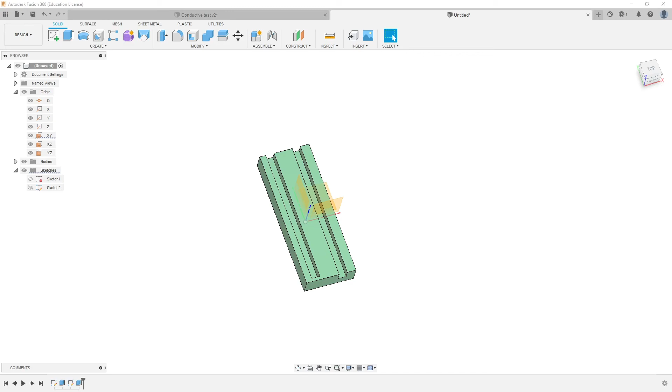I am going to talk about how we're going to use the projections we just learned about to anchor the slots we made to the edge. So if we change the size, the length of this block, they will follow along. That's the main goal. We're also going to talk about symmetry, how we get the two slots to be even across the center line.

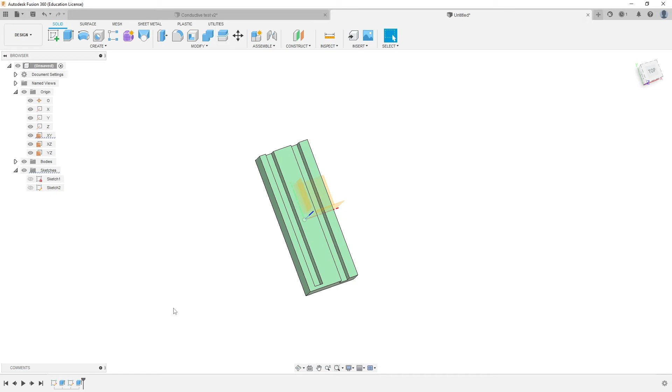So I want to modify this. I pick this somewhere in the slot right there, and notice you get these lines over the top of the extrude. That's where we're at.

Over here, if you did this in order—this is a bit of a bummer the way Fusion does this, but whatever—if you made a sketch, then extruded it, then made a sketch and extruded it, you could theorize that the sketch for those slots, that solid right there, is this sketch right there.

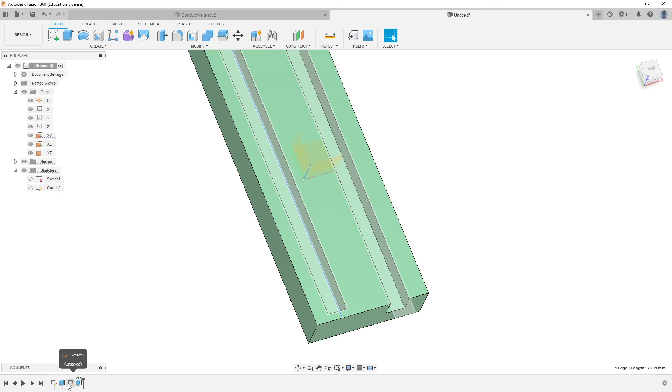So now I can double click on that and get back into it, okay? Now, the 5 millimeters that is here, we can go ahead and leave that.

But what I want to do, I'm going to tip this to the side. I want to do the projection. Now, this is why I didn't show you projections right here immediately, because my plane, my sketch plane, is right on top of the face.

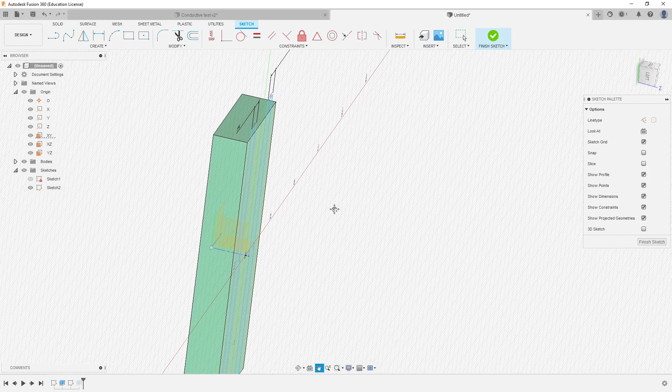So the word project, it kind of makes sense that it's sending it somewhere. The last video I showed you, that made sense when I put the plane out here and you see it projecting. Well, now when I pick this edge, it's going to project it onto the plane that I'm on, which is really in the same place as that edge anyway, so you're not going to see anything very dramatic.

The other point here, though, is even though this thing right here is planarly in the same area as the sketch we're on, they are not pickable. They're not the same thing. I still have to project it forward.

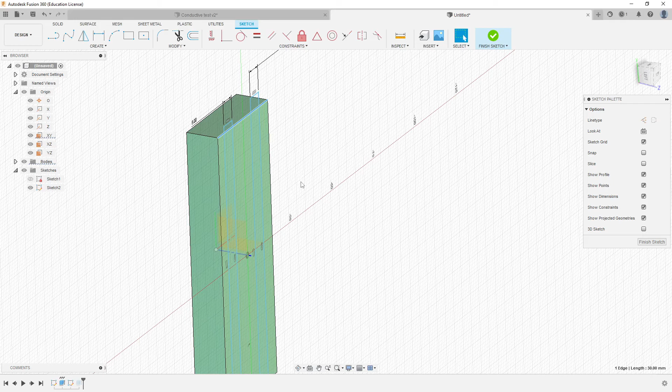So I'll click on the background just to do this all nice and proper. I'll hit P for project. That brings up the project window, and I can pick that edge right there. Then I can come down here and pick that edge right there.

And if I project them right now, they will be solid lines. Remember we talked about this? So I'm going to come over here and turn on construction line before I project them.

Okay, so two things are going to happen here. I'm going to make a projection, and as I project it forward, it's also going to turn it into a construction element for me, a guideline.

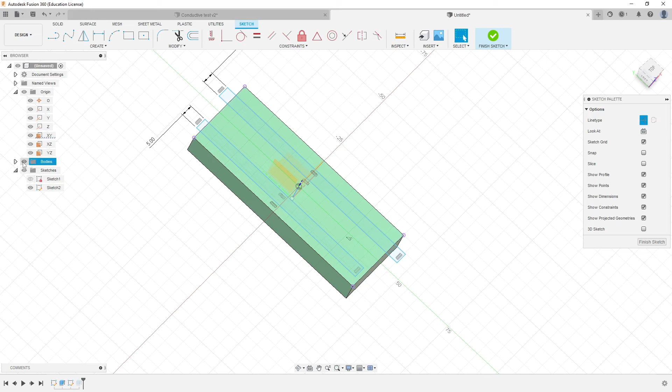So watch, I hit OK, and you can barely tell. You can see there's some purple dots in the corners. If I hide the body, you can notice that there is that purple construction line, okay?

And again, I cannot manipulate this. I can't move it because it's linked to the other feature, okay?

Now, if I was slick and knew this beforehand, I would have done it first, and then made my rectangle like this. I would have went snap to it. Did you see that little X? That was a snap to a line.

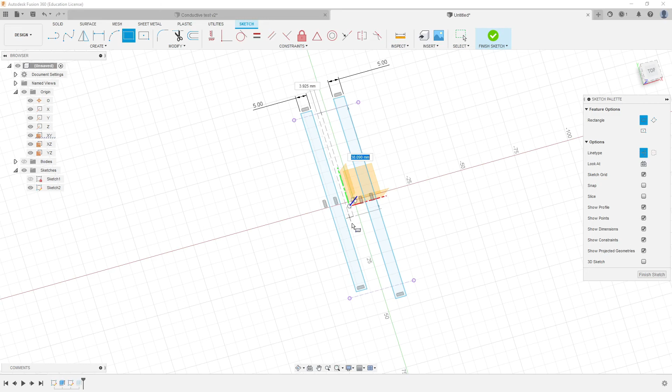Uh-oh, see, by the way, I'm making a construction line because I forgot to deselect it. That's going to happen a lot to you. I'm going to go ahead and continue this, and then I'll just undo it.

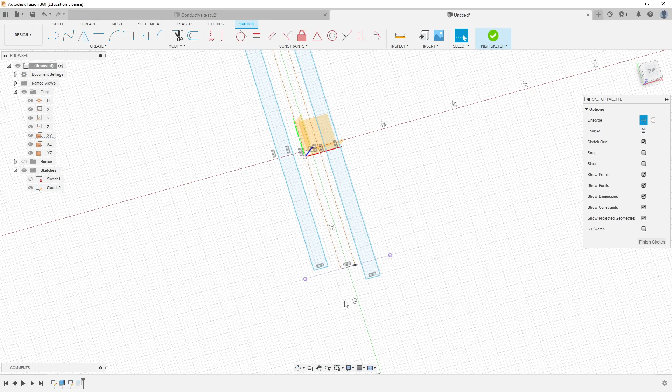So I come down here. See that X right there? That's snapping to the line. I click that, and now, if you can tell, it's kind of dark right there. It's anchored to that line. See? That's pretty good. I'm going to hit Control Z and get rid of that.

I'm going to click on the background, and turn that off just in case. Now, rather than delete these things and do it again—just because I showed you that it's probably a good way to do that—I can do it after the fact. So you have these constraints up here that are geometrical type constraints.

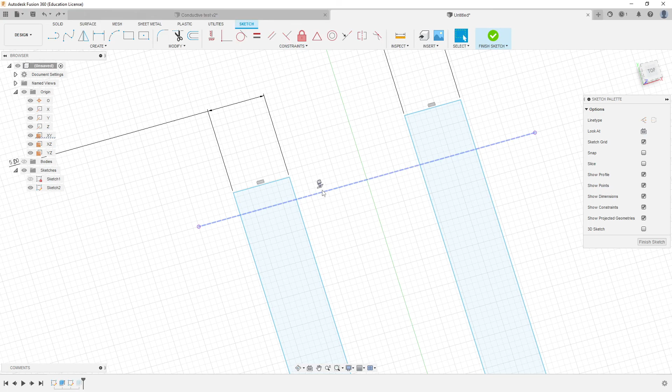Instead of being a dimension like a number, this is saying I want to make this point on that line, or I want to put this point on that point, or I want to make this line parallel with that line, etc. So the thing I want to do here is make this line collinear with this line.

I pick it. You could do it in a myriad of different ways. I could pick this one here, then pick collinear, then pick the other one, or I could pick this one, control-select it, then hit collinear and it would do it, or I could hit collinear first and then pick the two of them. Either way works. Did you notice it went black?

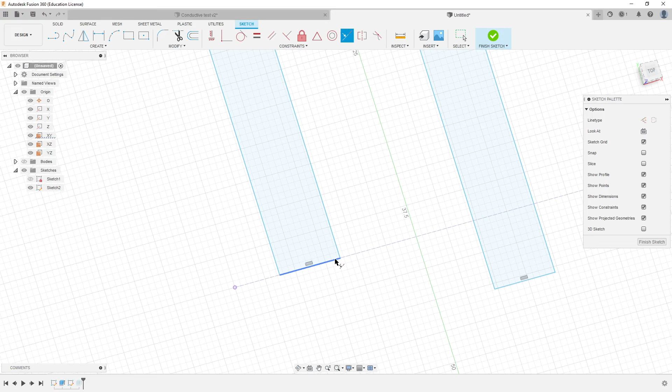This one here looks like it's right on the edge, right? It's not. It's not black. So I still have collinear selected, the tool is in my hand, so to speak. So I pick this and I pick that edge. Now it's black, now it's locked to it. As a habit, let's undo that.

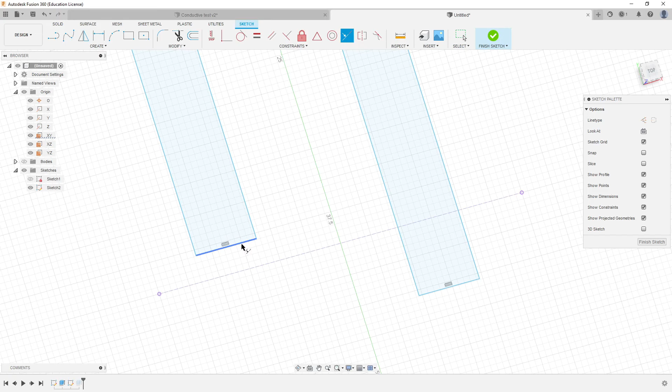When it was right over the edge like so, if you don't remember that it's supposed to turn black, grab the corner and wiggle it around, and you'll see that it's not anchored there. So we'll hit this, we'll hit that, we'll pick this, we'll pick that, get this one here and that one there.

Now they are - I undid too far. So I pick that one and that one. There we go, all black. Notice we're watching now for that black line. So we're stuck there, however, we can still move it side to side.

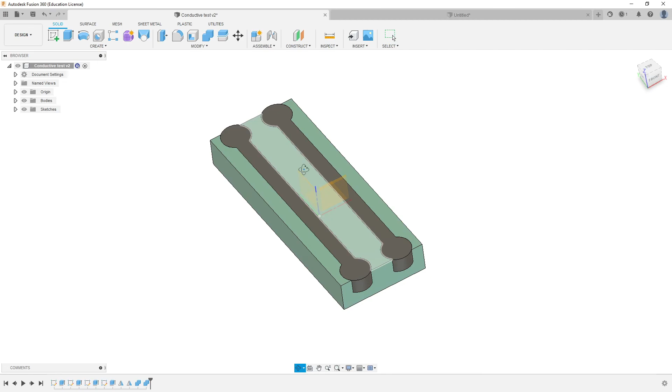So we need to fix that, and that's going to be done with a dimension, D. I pick this one right here, I pick that one right there, and bring this out. Did I make it 10? 10 seems kind of big. Let's go check the other one here. I can go to this sketch right there, and the distance - yep, it's 10. So they're 10 apart.

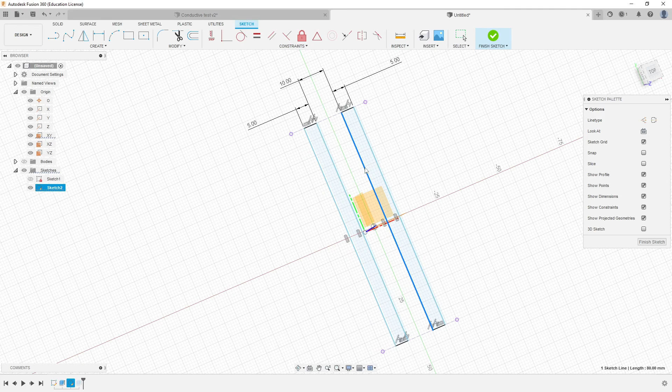Now it still didn't turn black though. We've got 10 here, we've got 5 and 5 here. We've got it locked vertically, if you want to call it that way. But you see, it still moves side to side. But the two of them move together - they're all locked together, but we're still moving side to side.

So what I could do is dimension this line right here to the center point right there. You see that? And I could make it be 5, half of 10, right? But another way to do this that's a little more permanent - meaning, what if I made 10 be 15, and that other one's still 5, and it's going to be offset. You see how we're thinking? We're thinking ahead - if you modify this, we want things to follow along nicely.

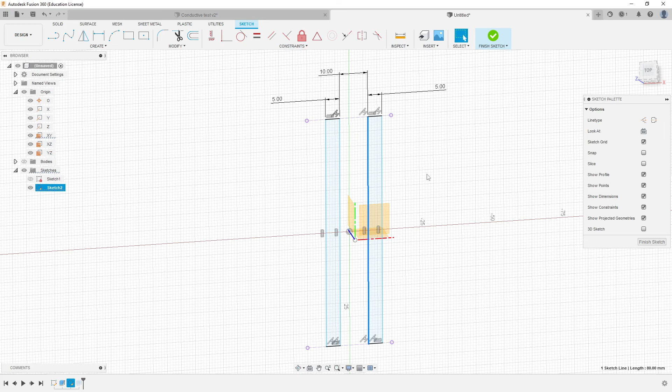So I would like these two right here always to be even across a center line, you see? So I want to use this symmetry tool. The way it works is I'm going to pick one thing, pick another thing, and then a center line, and it's going to make it even across. However, I do not have a line yet, and this is a small irritation, I guess you'd say.

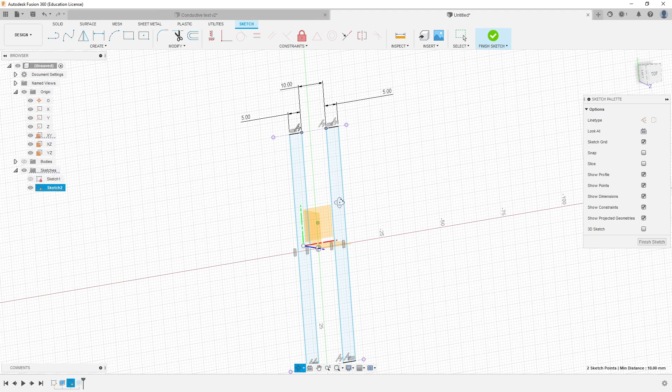Let's see what I can do with this. So I can pick this one here, I can pick this one here, and if I hover over, you see what I'm doing here? I can't select these things - it doesn't let me. Other programs will let you pick them. See this red line right there? And the green line? Nope, can't pick them.

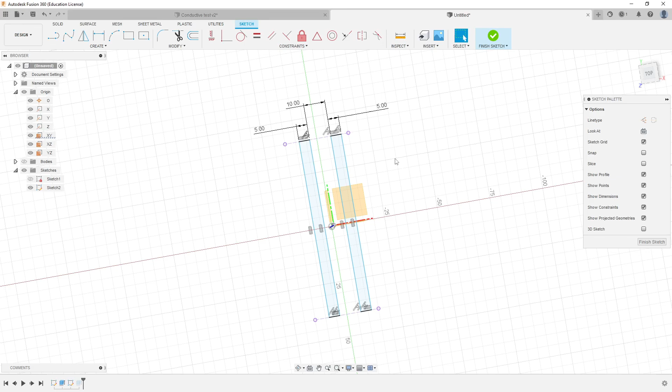Other ones would. So unfortunately, looking ahead at what you're doing here, you go, I want to do symmetry, I want to make them even across there. I am going to make a line. So I hit L for line, which is this right here, the L for line right there. Okay, so I have the line tool in my hand.

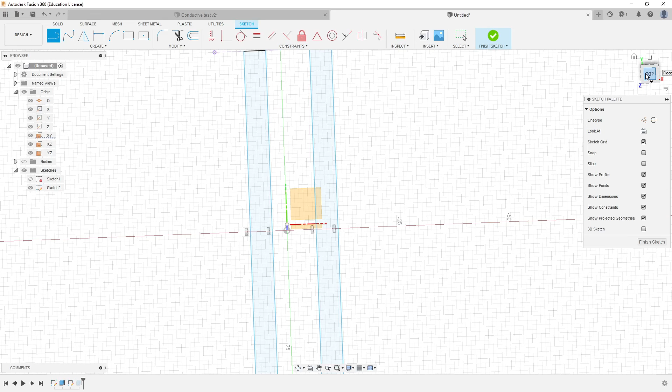I want to draw a line from the center point. I want to snap right to that center point - which center point? Well, the one that's on my sketch, not that one down there. It won't even let me pick it. I want this one on my sketch, that's the center of the sketch. If I go from the top view, everything lines up. Kind of makes sense, okay?

However, if I click and make a line, it's going to be that solid line, you see? So before I get started, I'll hit L for line and come over and hit construction. Or if I'm really slick, let's undo this — I hit L for line, then I hit X for construction, and that comes on automatically.

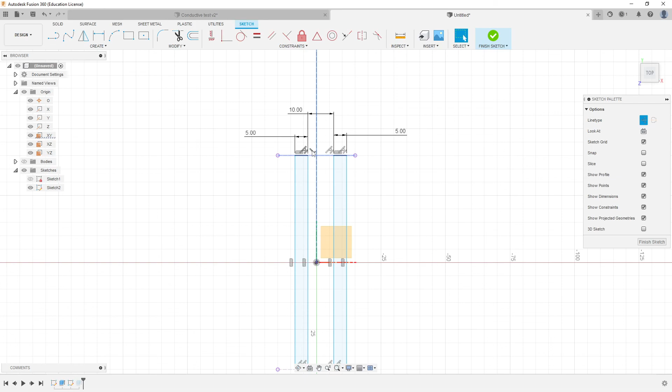Then I come up here, I pick, and I can make it really short, but that's hard to see. I don't need to snap to that line, but you could, because sometimes that makes good sense. Or I could also just run it way up here. You see? Now I ran it straight up, and it saw that it was perpendicular to this line right here, so it made it snap to a perpendicularity.

Other times you do stuff like this — L, bring this up, as I tip this around, snap, it just snapped to something. See that right there? It's making a parallelism to something over here. You see that right there? So it says that's parallel to that.

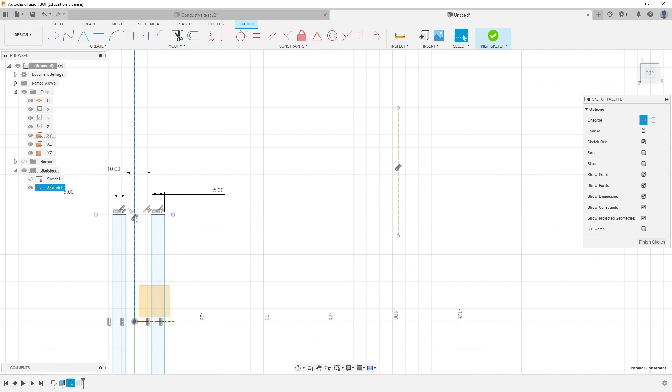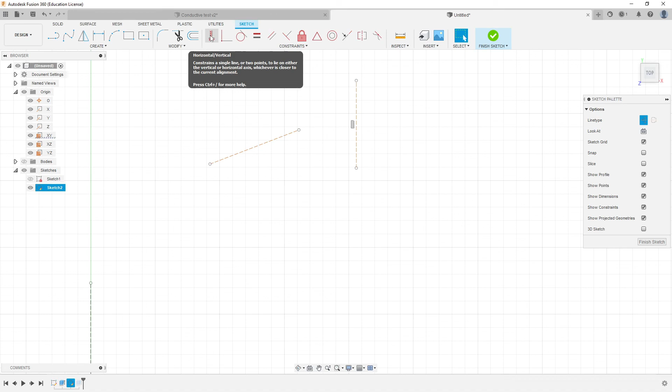The other thing you would normally see if there wasn't anything here to stick to is it would snap up and become this. That's a vertical or horizontal constraint right here. So I hit L for line and bring it kind of like this. It's kind of crooked, but it's mostly horizontal, not quite vertical. Depending upon which one is closer, it will snap it to it, you see? So this constraint happened automatically — this was me doing it manually, I guess.

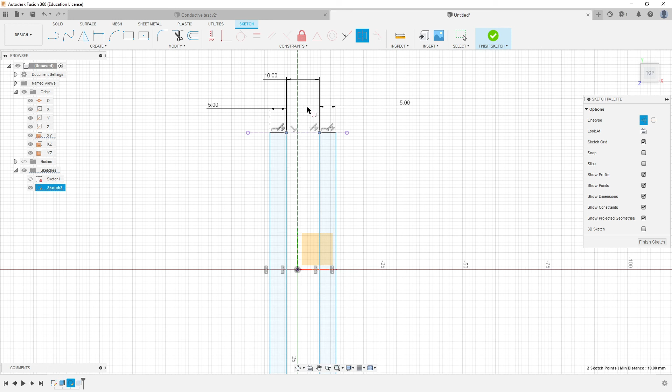Okay, so I'll select that — by the way, that's how you do that. Delete everything there, zoom in here, and now I have my line. Now I can go to symmetry, and I can pick — I usually pick a point. You could pick a line, that's fine too, but I pick this point, I pick this point right here, and then you pick the line. It doesn't tell you to do this, you just have to know that's how you're supposed to do it. And then, boop, everything moves over.

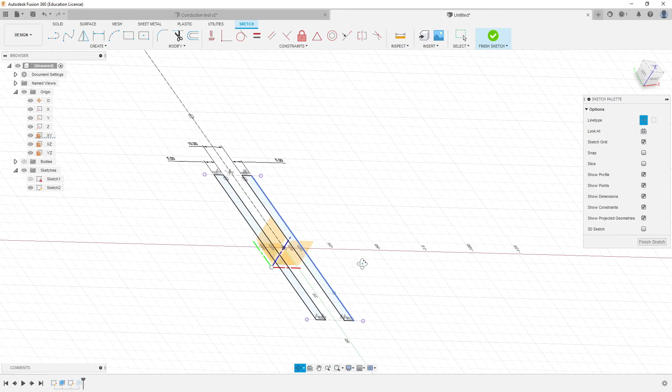Because this is 5, this is 10, that is 5, this right here is snapped to the purple line, this down here is snapped to the purple line. With the addition of the symmetry, it all turns black because there's no more ways that this could possibly move. And so that's our goal — that's what we want to do with every single sketch we make. I would even say even the stuff you don't care about, because it's good practice. It's a very good habit to build, so it's not so stressful when you have to do it — it's just already a habit.

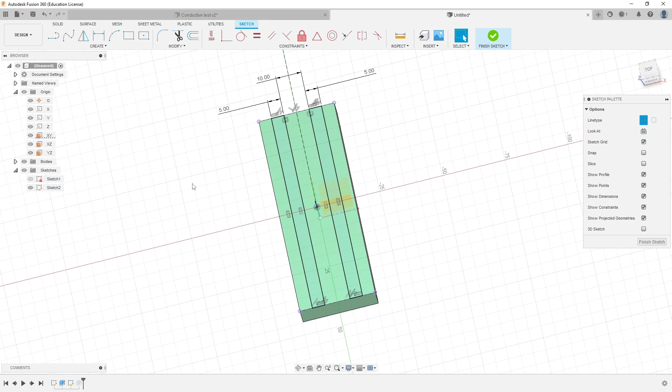So I'll turn back on the body. Now we've already extruded it, right? So don't go extruding it again — we'll just finish the sketch. And there we go. Okay, so there's our extrude down here, and it's doing what it's supposed to.

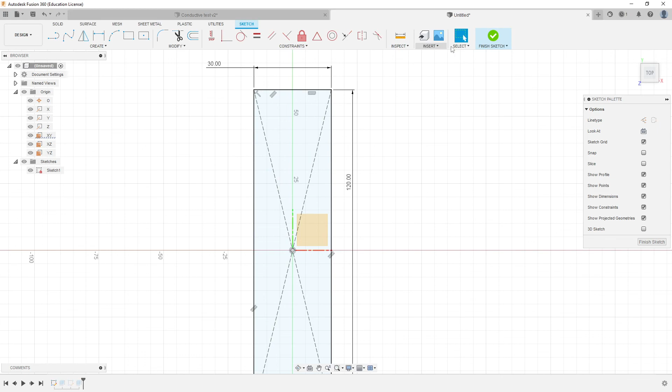If I were to go back here now and change this from 80 to 120 — because we did the projection and made it a construction and stuck the rectangle to it — when I finish this sketch, this will get longer, and so will the trough, you see? So that's a quick, fast reason why we do things like snapping things to projections and to edges, so it can accommodate future edits without you having to go back and manually edit all the dimensions of everything, right?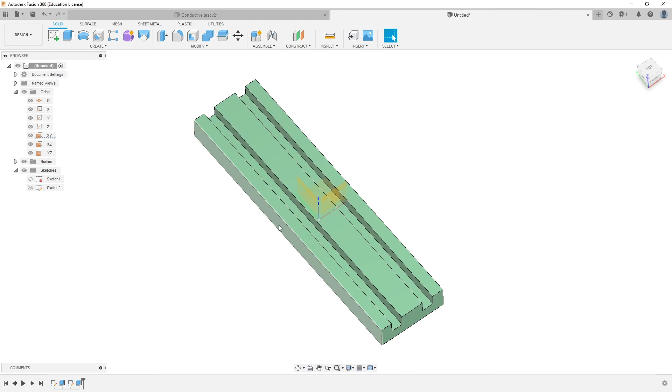Anytime I say something like this and it's a simple lesson like this, multiply that times 100. Imagine it wasn't just one trough — imagine it was 100 troughs and 100 different little things right here, and I made one change, and now I have to manually edit 100 different sketches. You see? So hopefully that makes sense.

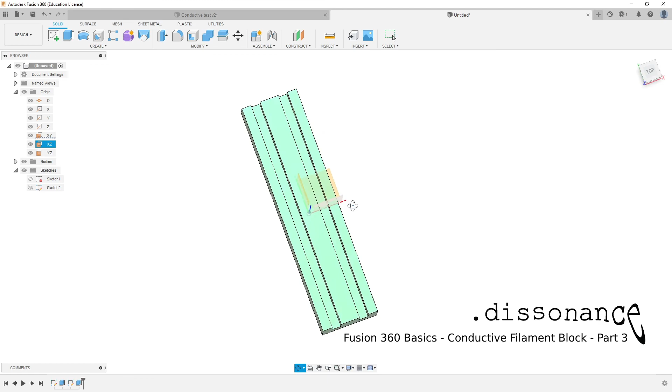This is the end of this video. The next thing we're going to do is work on making the strip that goes inside here.